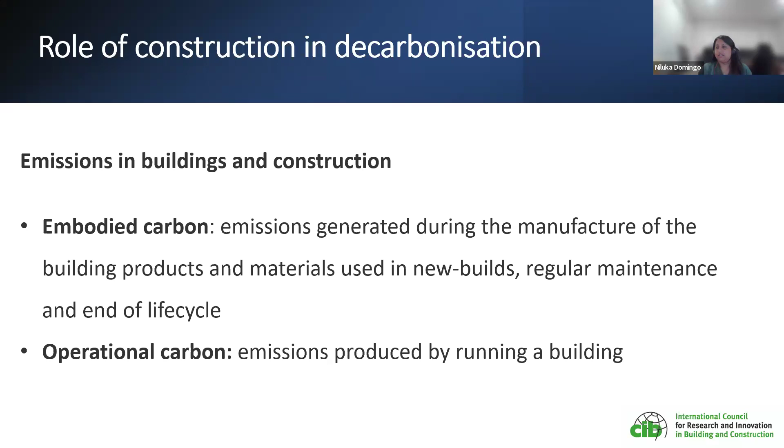And now, at the recently concluded COP28, this global status report for building and construction sector was published, and it says that the sector remains off track to achieve decarbonization by 2050. So, according to the report, around 300 billion US dollars were invested in the building and construction sector to decarbonize it across the globe. However, according to the Global Building Climate Tracker, which was launched in 2020 to assess the progress in decarbonization of building activities,

there's a gap between what needs to be achieved and what is achieved since 2015 to 2022. As you can see, the expectation was to increase every year by 6 points according to the building tracker. So this building tracker has 7 indices, and based on those 7 indices, it reports the activities happening across the world on decarbonizing building and construction sector.

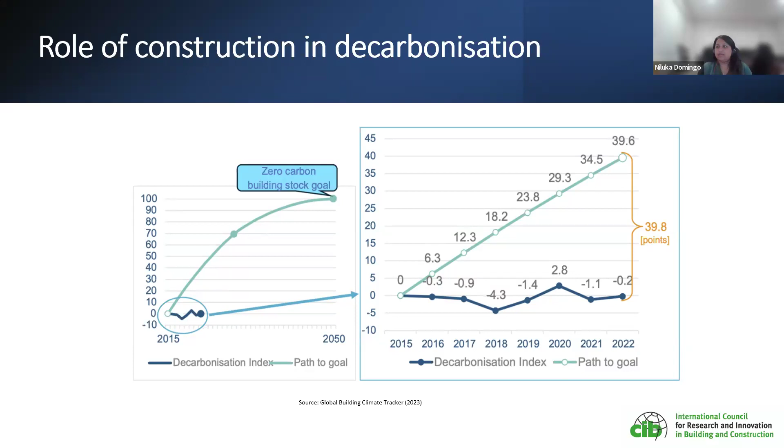Now, like I said at the beginning of my presentation, decarbonizing building sector cannot be achieved in one day, and it's not a responsibility of one party. It needs collaboration and coordination of the whole sector, in fact, whole nation as the end users of buildings. So to measure and keep track on carbon emissions in building and construction sector, a number of different standards come up with different methodologies, but the most common one is the European standard EN 15978.

So this standard introduced different life cycle modules to calculate carbon throughout the building life cycle. Like I said, there are two main emissions coming from building and construction sector. One is embodied carbon and the other one is operational carbon. So you can see within this green boundary, the modules responsible for embodied carbon emissions in building life cycle. And operational carbon is usually during the operational stage in a building life cycle. To calculate the whole life carbon, you need to combine the two. That is covered in this blue borderline here.

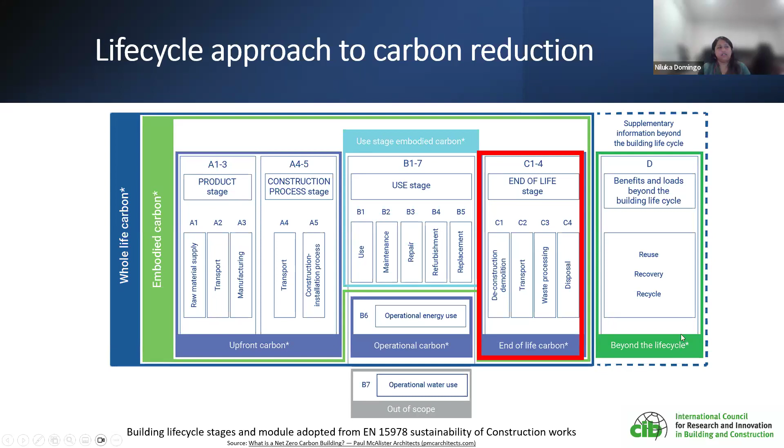And also there are some system boundaries introduced to report carbon calculations. So this is to standardize the process and help people understand from where to where this carbon accounting happens in the life cycle.

So for instance, here I have listed 5 key system boundaries. One is cradle to gate. Cradle to gate is basically the product manufacturing stage carbon emissions, and cradle to site is product manufacturing plus delivery to site, and cradle to end of construction is product manufacturing plus up to installation on site, and cradle to grave covers product manufacturing till end of life cycle of the building, and cradle to cradle covers full life cycle including module D.

So those are the key system boundaries in carbon reporting, so that once you know the system boundaries, you know from where to where the carbon is captured in a building life cycle, and you can report carbon based on these different levels in a building life cycle.

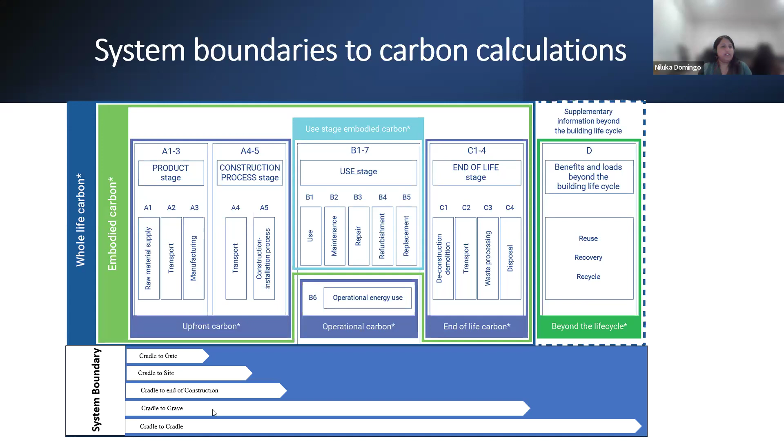And according to research, if you want to reduce especially embodied carbon emissions, you have more opportunities in the early stage of the building. So as you can see here, the potential to reduce embodied carbon significantly drops after design is finalized. So actions need to be taken early stage in a building life cycle to reduce embodied carbon emissions.

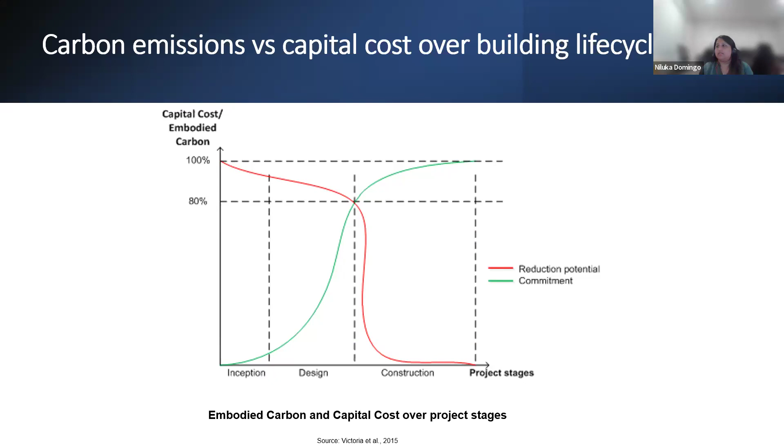However, this is applicable to operational carbon emissions to a certain extent, because to reduce the operational carbon emission, design has a key role to play. Like for instance, making passive design and using light fittings with less energy consumption and so on. So design and early stage in a building life cycle has a key role to play in reducing emissions in the whole building life cycle.

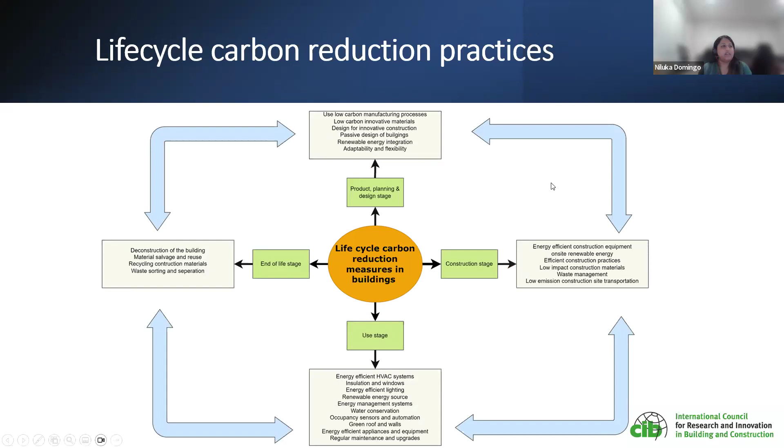And here I have mapped some of the key carbon reduction practices used in different life cycle stages. However, I'm not going to explain one by one because you probably know most of these practices. From here onwards, I'm going to present some of the initiatives taken in New Zealand, and also some of the findings from my research representing different life cycle stages on carbon reduction.

So, like I said in the beginning of the presentation, early phases in the building life cycle have more potential to reduce carbon emissions. Now, in order to understand the carbon emissions from a building, we need to know what are the materials that go into a building and what is their contribution to total emissions. So, to understand this, we did some case studies here in New Zealand for the building sector.

Now, here you can see the findings from a residential case study that we did. We assessed one typical residential project, a detached home with 4 bedrooms, floor area roughly about 200 square meters, two-story building with 2.5 bathrooms. Based on the bills of quantities and actual materials ordered on site, and also making some assumptions on material replacement cycles, we calculated the total material mass that goes into a building over the life cycle. And based on that, using some available carbon databases, we calculated the embodied carbon of these materials.

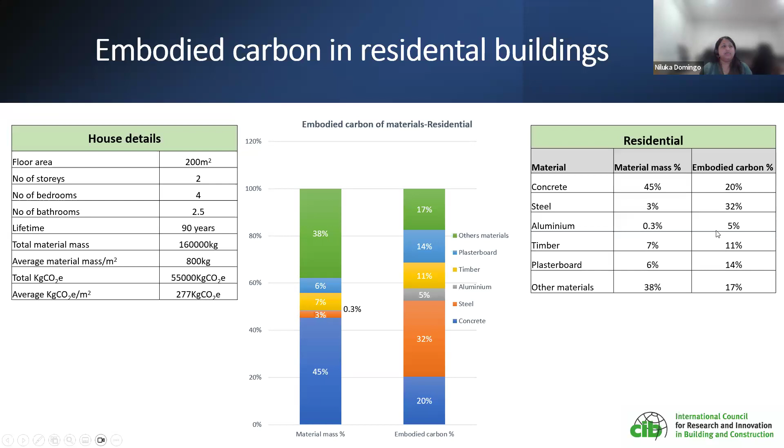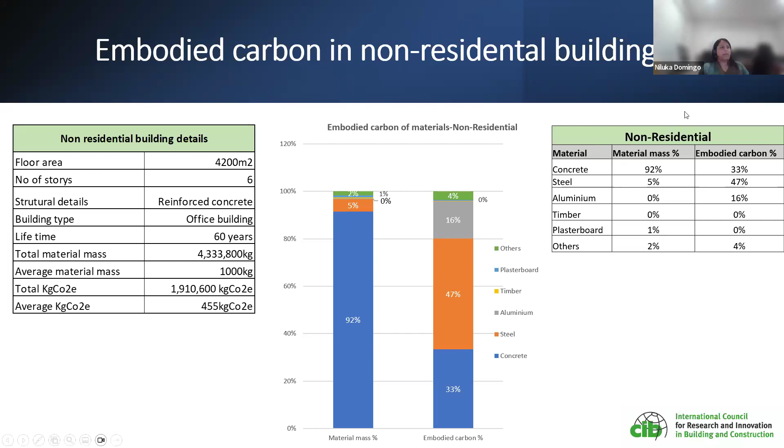So in New Zealand, some initiatives have been taken to reduce carbon emissions in these two materials' manufacturing process. Because this is not only the case in New Zealand, concrete is one of the most extensively used construction materials across the globe, and according to statistics, about 14 billion cubic meters of concrete are manufactured in the world annually. And out of that, in terms of emissions, 90% of concrete emissions is coming from cement manufacturing.

So it says that conventional cement manufacturing emits like 4.2 billion tons of carbon dioxide, which is like 8% of total emissions in the world. So in New Zealand, recently they launched a roadmap to achieve net zero carbon in the construction industry. One of the key initiatives that they are taking is to replace the cement with supplementary cementitious materials.

And you can see some of the alternative materials identified in New Zealand, and the government believe that by substituting cement, the industry will be able to reduce the carbon footprint of concrete by 20 to 80%. However, there are some barriers associated with this, like high initial cost, lack of local supply of SCMs, and high cost to import SCMs to New Zealand because New Zealand is a remote country, and of course reluctance to use anything is difficult

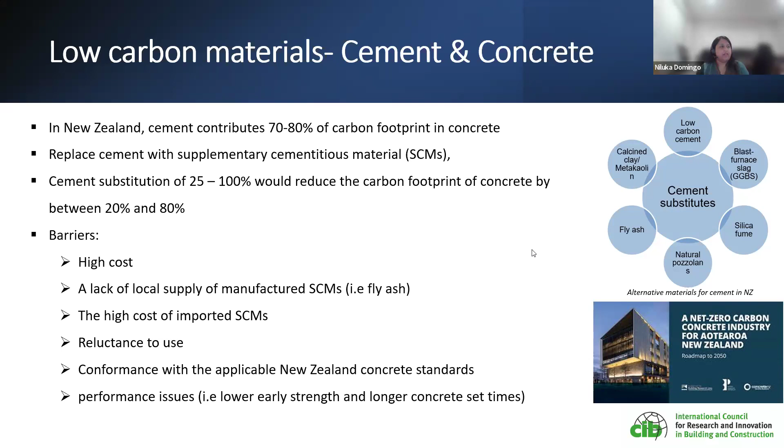And the other culprit, like I said, is steel. And with steel, actually, there is not much that the government can do. However, in the short term, they are planning to go with some initiatives like optimizing steel framing, for instance, thinning the structural steel beams where unnecessary, and also trying to recover and reuse steel as much as possible. At the moment, the recovery rate of steel is around 75% in New Zealand. So, trying to increase the recovery rates.

And recently, the government launched a project with New Zealand Steel. This is about a $300 million investment to replace the steel manufacturing process with an electric arc furnace. By doing that, they plan to remove two kilns out of four at the moment, and replace one melter. It currently has two melters, and this method allows external scrap to be used in the process. So by doing that, they believe around 45% of steel manufacturing emissions could be reduced in the future. So fingers crossed on that.

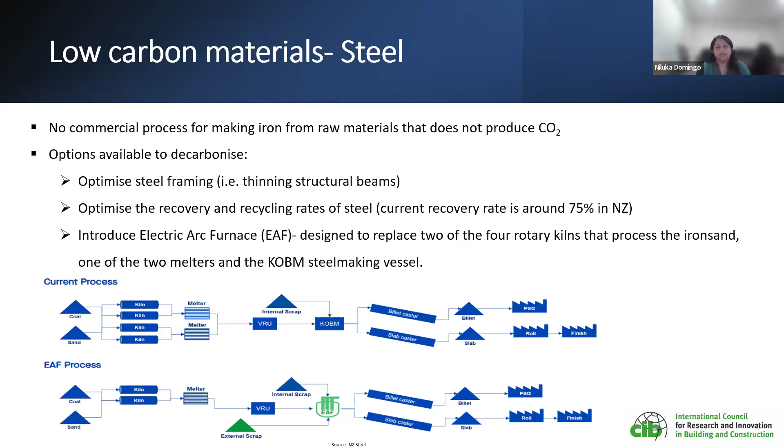So, moving on to on-site carbon reduction, we have done a survey with 100 contractors in New Zealand representing different tiers, about one third in each tier. We identified five key on-site carbon reduction practices used by New Zealand contractors, and you can see the weighted averages here as well. So basically, they are trying to reduce carbon by making material transportation and handling more effective, like acquiring locally sourced materials, using renewable sources to transport materials, and also reducing transport frequency by utilizing larger or full truckloads.

And also during material selection and usage, they try to use innovative and low carbon materials, and implement on-site waste management plans. It's not mandatory yet in New Zealand. And also promoting more use of recycled materials. Plus using EV vehicles to run on site and things like that. Also, they are considering practices to reduce on-site carbon.

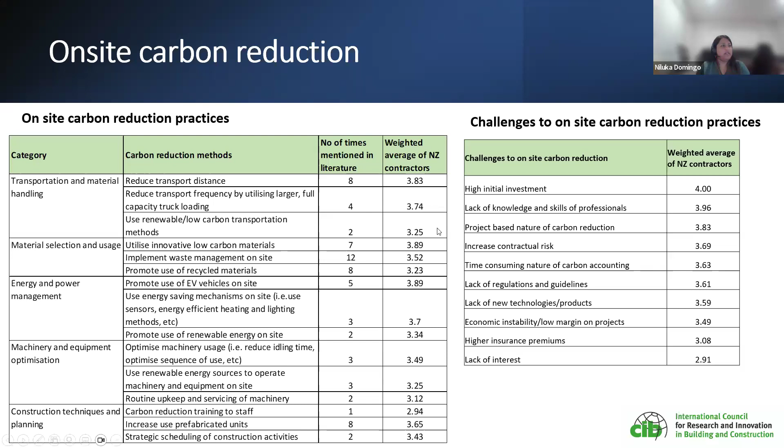And we did another study to try to identify waste management in New Zealand, because managing waste is one of the ways that can reduce embodied carbon emissions during the construction phase. So we assessed waste reports from around 100 residential projects across the country to understand the waste generation rate and what are the key materials that go into waste streams. So as you can see here, a typical New Zealand house generates around 28 to 38 kilograms per

square meter. Compared to world statistics, this is not very low or very high, this is in the medium range. However, the waste diversion rate is still 75%, and the rest still goes to landfills in New Zealand, which is quite high. And in a typical New Zealand house, about 8 to 10 kilograms per square meter goes to landfills.

And again, by doing that, we try to understand what are the key materials that ended up in landfills and how we can recover them to reduce embodied emissions from building construction.

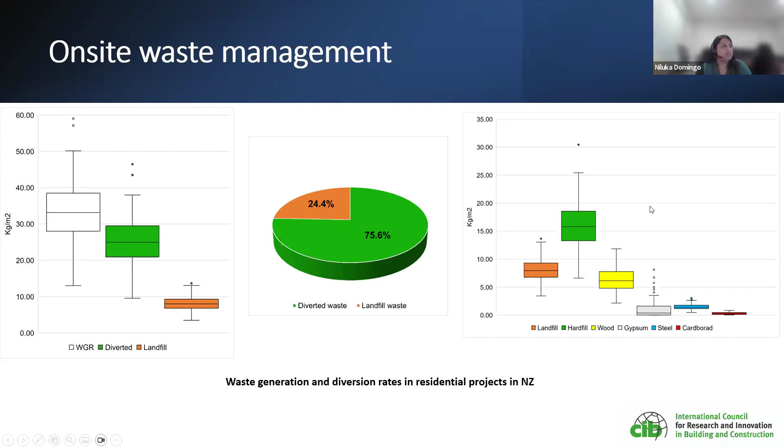And moving on to operational stage, in operational stage, embodied emissions are coming from material replacement, refurbishment, and so on. But the key emission during the operational phase is due to building use, the energy used for building operation purposes.

So, according to the energy report published recently in New Zealand, New Zealand uses around 550 petajoules of energy across all sectors, and out of that, residential and commercial sector consume about 1/4 of the total energy use in the country. So that is quite a significant amount, and the government is planning to shift from non-renewable sources to renewable sources in energy production.

So at the moment, around 30% of New Zealand total energy consumption is coming from renewable sources, and the government is planning to reach 100% renewable electricity generation by 2030. So that's the current target.

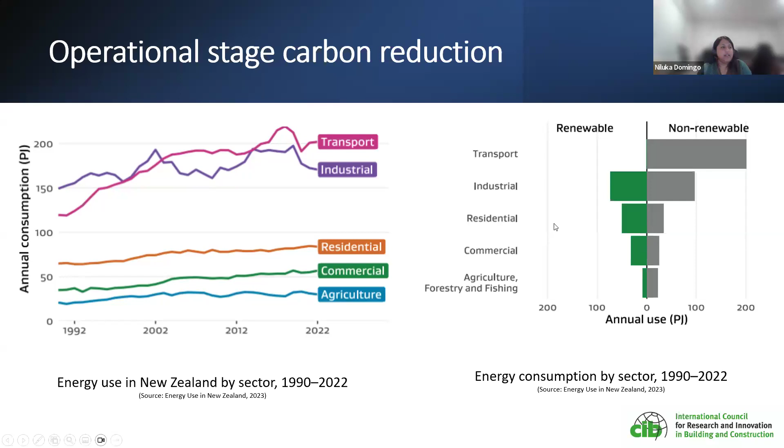And again, these are some findings from some of the studies we did to understand the energy behavior in New Zealand homes. So, according to some research, especially done by Green Building Council in New Zealand, it says that the buildings are not performing to the required level of their Homestar or Green Star rating, and one of the reasons is the behavior of occupants in the operational stage. So again, according to statistics, the average household uses like 10,000 kilowatt hours of energy annually.

And so we did this study to understand the energy behavior in New Zealand homes using immigrant population, because a lot of immigrants are coming to New Zealand, and we try to understand how they behave, because they come with different practice, different countries, especially Asians. So according to this study, the majority prefer temperature in their room around 22 to 24 degrees Celsius, which is quite high compared to a typical Kiwi requirement. And the living areas and bedrooms are the key areas that they want to heat during the winter times.

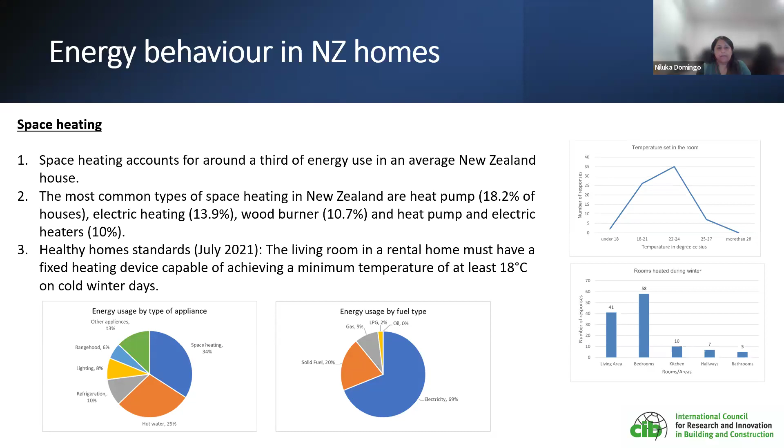And moving to the last part of the building life cycle, end of life cycle, one of the key things that construction industry could do is circularity of materials. Now, in most countries, circularity of materials is not very common. It's still a new concept. So we still use the traditional take, make, waste approach. But in circular economy, waste is going back to the cycle as a resource.

So we did a study in New Zealand, trying to figure out what are the options available to recover and reuse these materials that come as waste during construction and also from the deconstruction of buildings. So the key materials that get separated at waste processing plants are hard fill, timber, plasterboard, and steel. Some waste processing plants process plastic as well. However, due to small market scale, recycling potential is not fully explored for plastics at the moment.

Hard fill is almost half of the total waste coming from buildings, and that includes concrete blocks, tiles, stones, and so on.

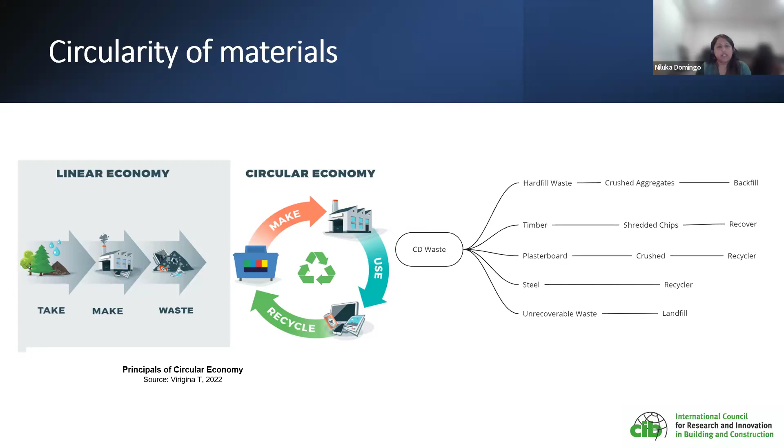And like I said, again, circularity of materials is not something that you can consider at the end of the life cycle. There are some preconditions that need to be made. So we did a systematic review to understand what are the prerequisites to enable circularity in construction, and also what are the barriers. So you can see 8 key prerequisites and obstacles to initiate those prerequisites in the building life cycle.

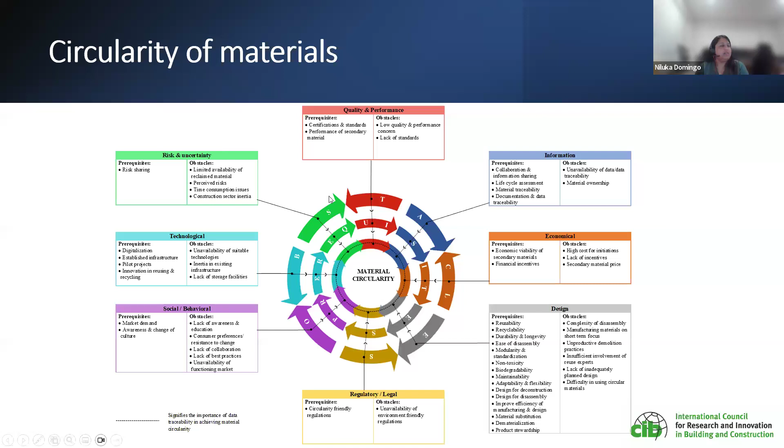And yeah, so that is the end of my presentation, and I would like to conclude my presentation with a famous quote from Simon Wiesenthal, that our actions today will shape the world of tomorrow. Because like I said throughout the presentation, achieving net zero carbon in the building and construction sector is not something we can do overnight. And by embracing and being open-minded to new technologies, sustainable materials, and efficient processes, we have the power to transform our industry.

So, moving forward, it is important that we remain committed to collaboration, work transparently, and are open to continuous improvement. And by working together across disciplines and sectors, and sharing knowledge and best practices, we can accelerate this goal to be carbon zero in the building and construction sector.